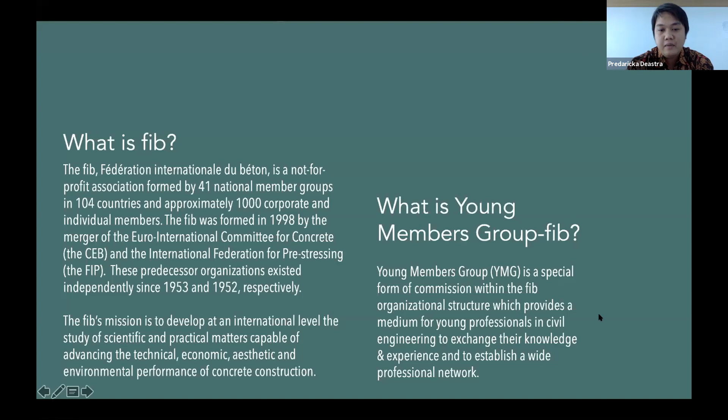The FIB also have Young Members Group, a special form of commissions, which provides a medium for young professionals in civil engineering to exchange the knowledge and experience and to establish a wide professional network. To deliver the mission, the FIB YMG also organized webinars with broad interesting topic in civil engineering area.

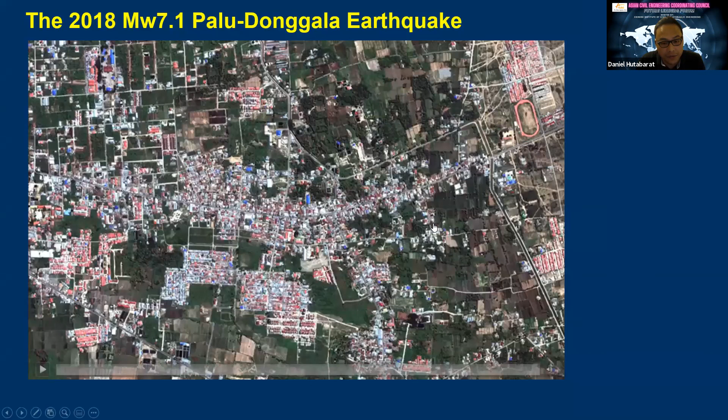Before I start, I'd like to show this unprecedented scale of ground movement during the Palu earthquake. I visited the site a couple of days after the earthquake to investigate what happened. We can see here where the ground moved due to the earthquake, due to soil liquefaction. The damaged area is about 2 square kilometers - a big, massive ground movement.

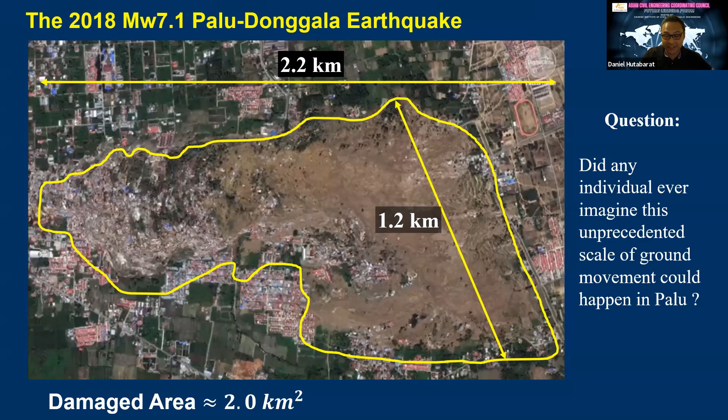When I visited the site, one question in my mind was: do you think any individual ever imagined this unprecedented scale of ground movement could happen in Palu? I think no one. That's a really important question, which indicates that risk assessment is very important, and all possible events that could happen should be quantified and analyzed. This type of unprecedented scale of ground movement should not happen again in the future.

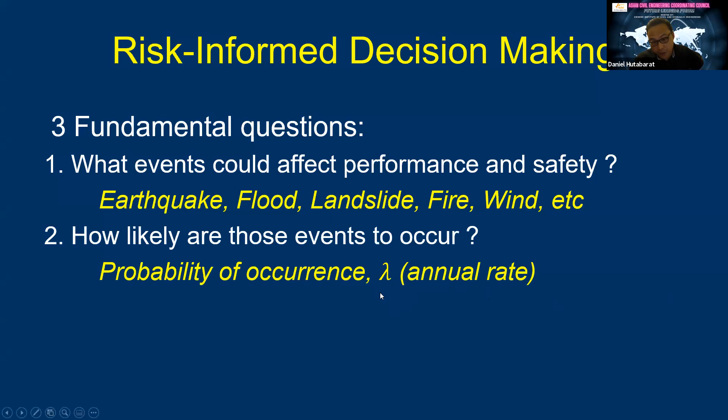As engineers, we are pushed by users, owners, and clients to inform them of the risks we are dealing with, and we're always asked three fundamental questions. First: what events could affect the performance and safety? Events like earthquake, flood, landslide, and fire. Second: how likely are those events to occur? We're talking about the probability of occurrence - how likely it happens in a year. I call this lambda, a variable I'll use later in this presentation, called the annual rate.

The third question is: what are their consequences? How many people will die? And what are the repair costs, economic damages? As engineers, we are at the center of the circle - we know the mechanics, we know the science. Only we can communicate all the hazards to owners, operators, users, policymakers, economists, scientists, and everyone.

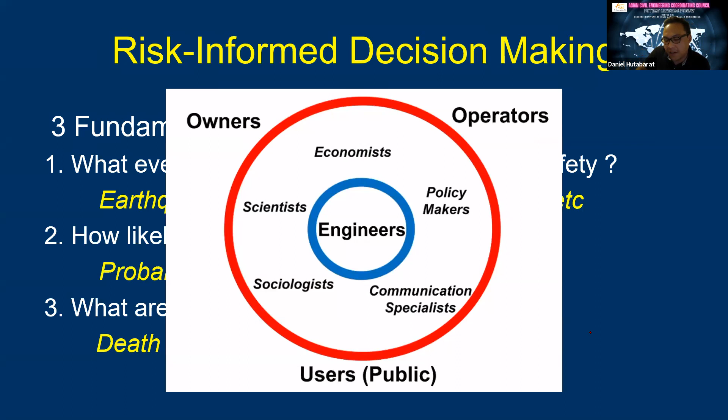In this presentation, I'd like to give an example of how we can assess risk using a holistic risk assessment approach in a simple project. I'll take a hypothetical example: let's say we want to build a railway track on an embankment, and the embankment is underlain by alluvial liquefiable soil.

Let's say the yield acceleration is about 0.2g, and the question is how large the slope will displace if an earthquake happens. We have two levels of site investigation: one with field measurement, and one using only empirical correlations from tests to estimate the stiffness of the foundation soil. This is an example of shear wave velocity - basically the shear modulus, which determines how the soil propagates the seismic wave during an earthquake.

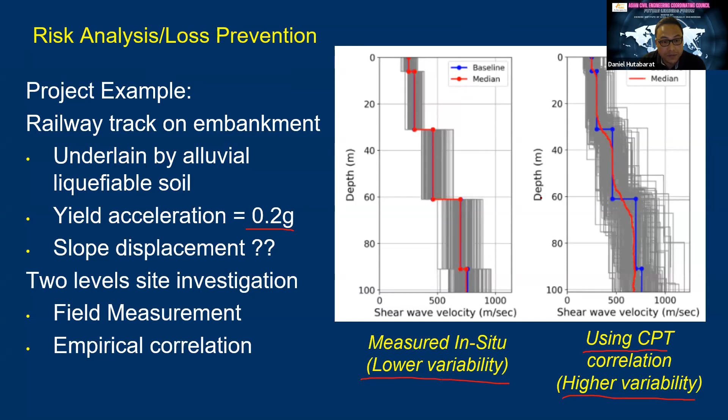On the left, this is measured in-situ parameters where the variability is narrower, compared to the right plot, which is estimated shear wave velocity using cone penetration test type correlations - this has higher variability compared to the left one. So we will deal with these two types of data, and then we want to assess what the risk is.

In risk-informed engineering decision-making, especially for earthquakes, when an earthquake happens it generates ground motions. The role of the engineering seismologist is concerned with how likely a 0.2g PGA is to occur - the level of acceleration that can yield the slope and cause it to displace.

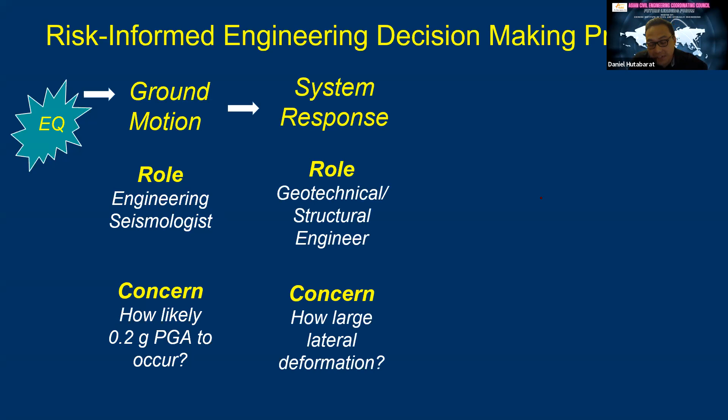The ground motions will excite the systems, such as a slope or a building, where we as geotechnical or structural engineers are concerned with how large the lateral deformation is. After the system responds, we want to quantify the physical damage, while the damage estimator or repair contractor is concerned with how large the railway will offset. And of course, for losses from the government and owner, the concern is how much the repair costs.

So how do we communicate all these steps of the process, and then we can take a decision to design our project. So that's the topic of my presentation today. In my institution now, which is the Pacific Earthquake Engineering Research Center, we have a framework called a performance-based design framework.

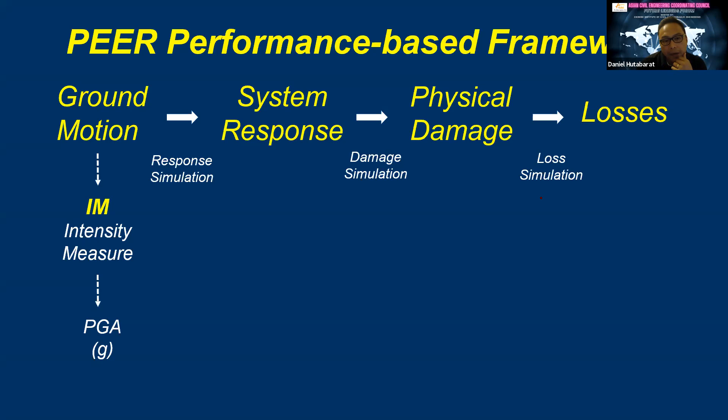Where the ground motion that occurs during the earthquake, we call it an intensity measure. For example, it's a PGA. And then from there, we can do response simulations to obtain how the system will respond.

And then we can quantify the engineering demand parameter, or EDP, which is the lateral displacement, like slope displacement. And of course, the damage measured from the physical damage, how far the rail will be offset and out of straightness, which will determine the repair cost, the decision variable DV, as a basis for the owner to take decision about the project.

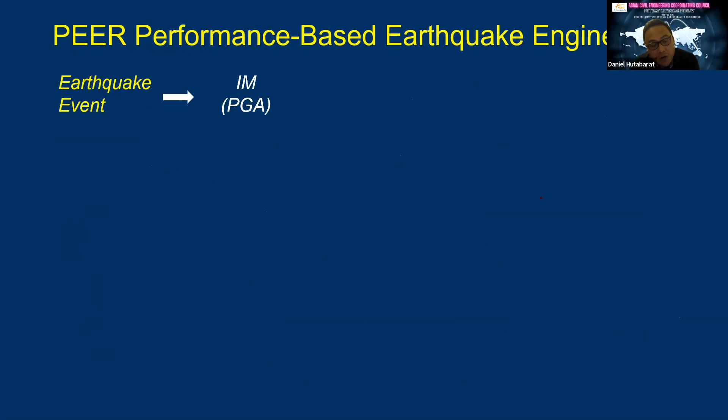So the PEER performance-based earthquake engineering is basically a very simple approach, where when earthquake happens, we want to know what is the intensity measure by performing hazard analysis.

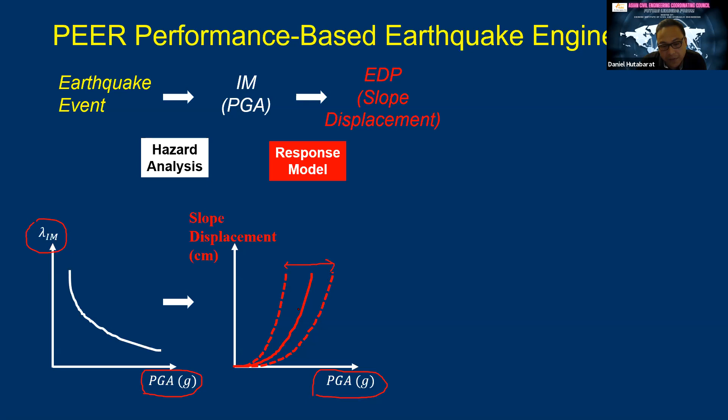And then once we know the PGA, we can estimate the slope displacement by using a response model like finite element analysis or limit equilibrium analysis - you can choose either one. And then we perform simulations by varying the PGA, increasing it, and then we can estimate the slope displacement. Of course, we have variability - this captures variability, and then we can estimate the model.

And then for the railway offset, we know the damage model, and we can estimate it by slope displacement - we know how much the offset is. And then from the offset, DV, we have a loss model, and from the railway offset we get the repair cost, which also has a variability. So as the offset gets very large, of course the cost will asymptotically reach a value, which makes sense, right? So how do we calculate this?

So let's imagine we have 5 possible peak ground accelerations, like 0.1g to 0.5g. And let's say this is what happened: when earthquake happens, it generates IM3, let's say 0.3g. From IM3, it generates about 25 centimeters of slope displacement, which is the EDP4. And then 25 centimeters of slope displacement will cause about 10 centimeters of railway offset, and from 10 centimeters of railway offset we can estimate maybe about $1 million of repair costs.

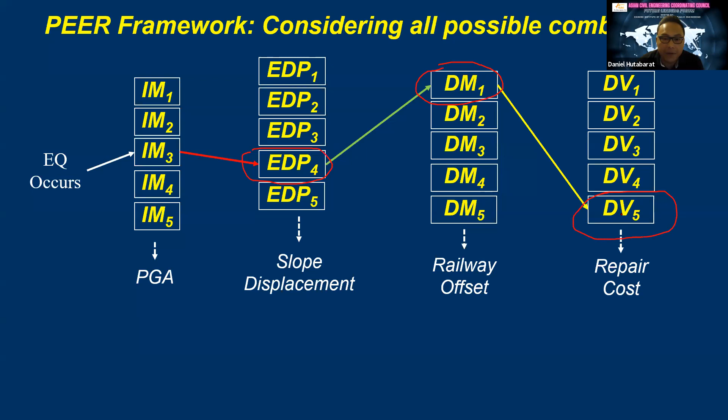But the probability that $1 million will be needed to repair this railway is the probability from the white color here, which is the earthquake, multiplied by the probability of how the PGA will cause a slope displacement, multiplied again by the green color, which is this step, and multiplied again by the yellow color, which is the probability of the damage measure - the 25 centimeter, 10 centimeter railway offset, causing a $1 million repair cost.

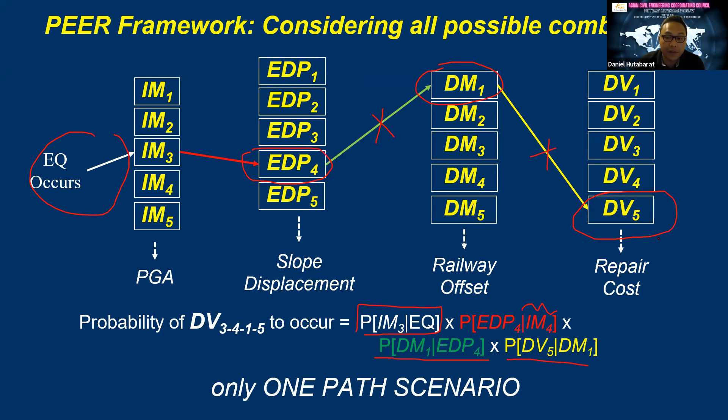But that's only one scenario, and the key of quantifying risk is we need to consider all the risks here. So how do we calculate this? Even though it looks very difficult, this is just summing all the possible events.

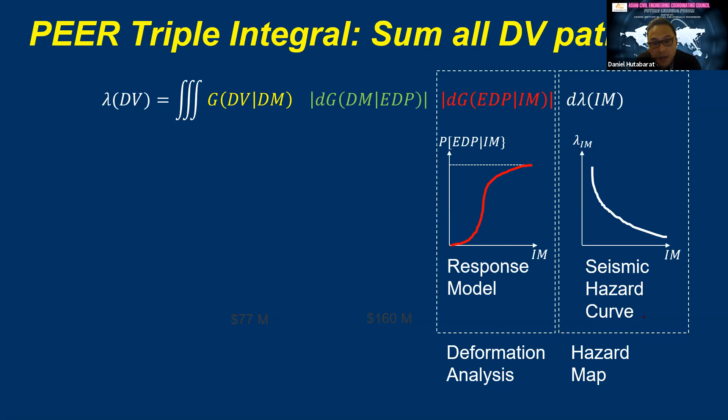So from right to left, the white curve is a seismic hazard curve, which we can get from a hazard map, for example a seismic hazard map of Indonesia. We generate a model, perform deformation analysis, and then we know the probability of a specific IM causing a significant EDP. And then from EDP we also get a damage model, and we keep multiplying them until, with a loss model as well, we finally get the loss curve.

For example, a loss curve for a specific project that I've been dealing with - this is one of the examples. Remember, I have two sets of soil investigation data. The blue color here is the annual probability that the owner will spend the cost. For example, for 0.001 here, it means a return period of 1,000 years.

The owner will spend about 160 million dollars if they use a cheap design without proper soil investigation and no expert hired, resulting in high uncertainty. If the owner chooses a better design with high quality soil investigation and lower uncertainty, the cost decreases. The probability of spending repair costs over 1,000 years drops from 160 million down to 77 million dollars.

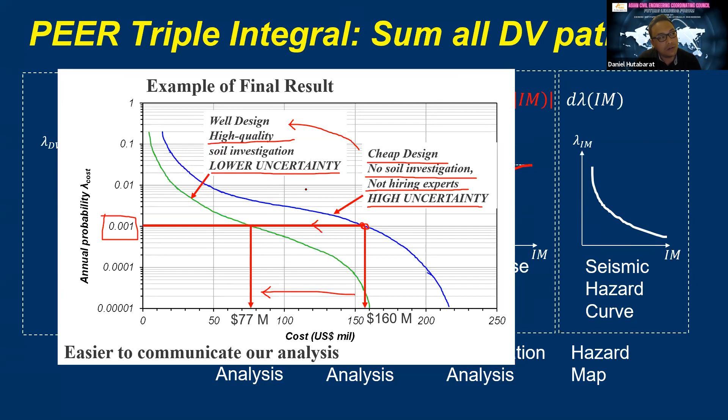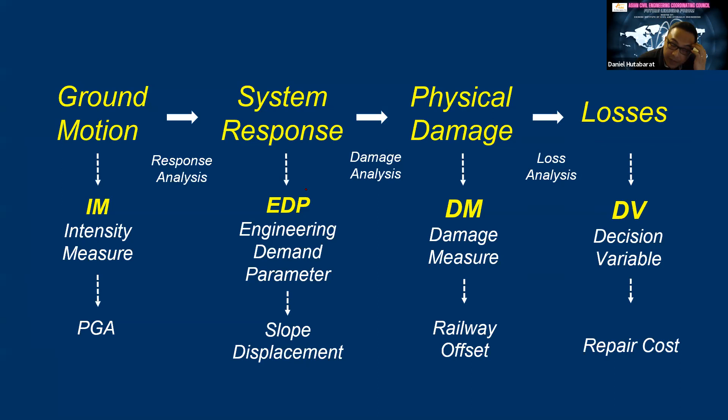By using this approach, we can communicate our analysis better to the owner and stakeholders. To summarize, this is an approach to quantify all the risks. Sometimes we forget the big picture because we were trained to stay in a box, focusing only on things like slope displacement or settlement, while structural engineers focus on building collapse, story drift, or drift ratio. We are trapped in these boxes when the big picture is bigger.

So the key takeaway is that we should always think probabilistically, constantly asking, what if this happened, what if that happened? We need to consider everything that can happen, so that the type of event that happened in Palu does not happen again.

The second point is hazard resiliency, which is all about risk estimation and loss prevention. By using the framework established in PEER, we have a well-established alternative approach to perform hazard resiliency evaluations.

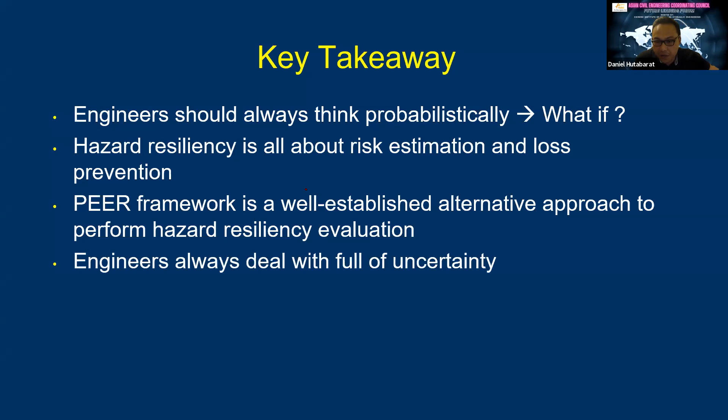Engineers always deal with uncertainty, and I think this is key. The challenge in any project, whether geotechnical or structural engineering, is uncertainty because we deal with geological materials full of uncertainty. I'd like to close with a powerful quote: risk is a measurable uncertainty, but uncertainty is an unmeasurable risk. So if we can measure anything, we can measure the risk.

I would like to remind all of us that we also have a code of ethics for engineers, this one from the U.S., where fundamental canon number one, our first priority, is that engineers shall hold paramount the safety, health, and welfare of the public.

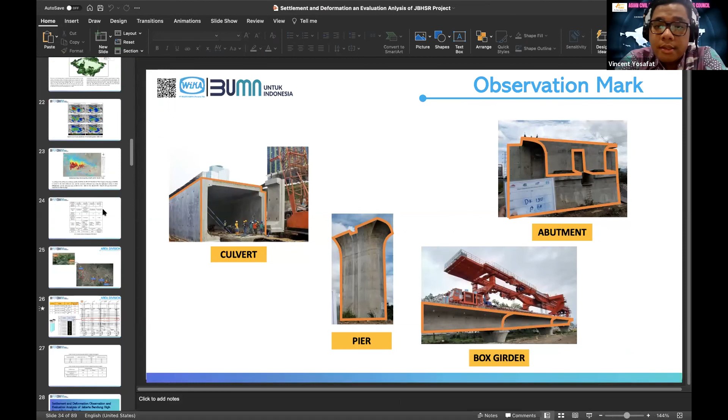Thank you for the kind introduction, Mr. Derek. Good afternoon everyone, it's an honor for us to be speakers at this ACECC webinar. Nowadays, infrastructure has become one of the main focuses of development and improvement in Indonesia. Hence, we are now faced with various mega projects, each with different challenges. But who here knows what kind of challenges we must encounter in one of these mega projects in Indonesia?

To answer that, let us introduce ourselves. I'm Vincent Yosafat, currently enrolled as construction manager, and my colleague Alve Yunus as engineering manager, at the Jakarta-Bandung High-Speed Railway Project, PT Wijaya Karya. We are now in charge of one of the most noteworthy projects happening in Indonesia.

For the first brief introduction of our project, it will be presented by Mr. Alve. Okay, thank you Vincent. So your screen is already seen, right?

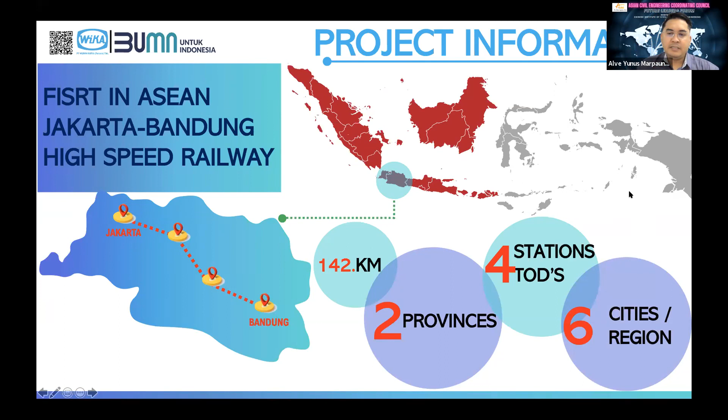The Jakarta-Bandung high-speed railway is considered the first high-speed railway in ASEAN. The length of this railway is 142 kilometers, crossing two provinces, with 4 station TODs, and crossing 6 cities or regions in Indonesia. The project name is Jakarta-Bandung High Speed Railway, or JBHSR.

The project owner is PT KCIC, Kereta Cepat Indonesia China. The contract value of the joint operation is around 4.71 billion US dollars, or about 62.83 trillion Indonesian rupiah. Our company, PT Wijaya Karya, has a 30% portion, so the value is about 1.4 billion US dollars, or around 19 trillion Indonesian rupiah.

The contractor in this project is the High Speed Railway Contractor Consortium. The members are from China and Indonesia. We have CREC for project management, CRDC for design work, CRSC for signaling work, and CRRC for the rolling stock of the train. CREC is considered one of the biggest contractors in the world, and then there's Sinohydro, and last is Wika.

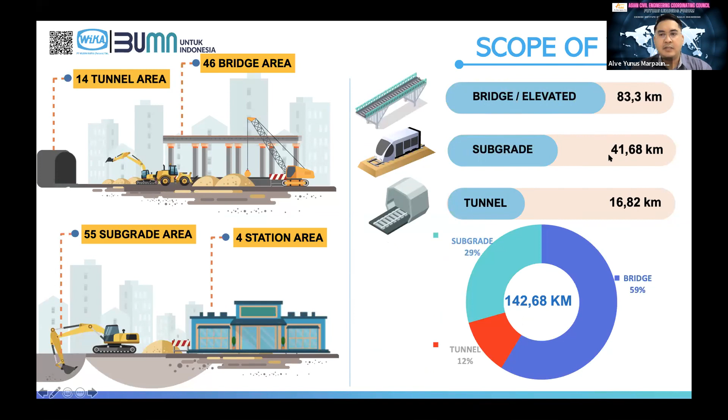This project has about 14 tunnel areas, 46 bridge areas, 55 subgrade areas, and 4 station areas. From the 142 kilometers, the elevated bridge is 83 kilometers, the subgrade is 41 kilometers, and the tunnel is 16 kilometers. This is the trace of our project from Halim to Bandung and Tegalluar.

It has 4 stations, divided into 4 sections: section 1, section 2, section 3, and section 4. For the whole structure, Wika has 30% of the portion. The blue color is Wika's portion, and the red color is the Chinese portion. For the continuous bridge, Wika's portion is 30%, and the elevated bridge is 40%.

For the pier column, in the whole project from Jakarta to Bandung, Wika has 100% of the portion, about 2,500 piers. For the tunnel work, it's all Chinese portion, and for the subgrade, Wika has 96% of the portion.

From Wika's scope of work, there are 1,200 pile caps and 12,000 bore piles, 155 box girder cast-in-situ, and 4 continuous beam structures. Wika's portion also includes 3 stations, and for the subgrade work, there are 69,000 spun piles, 6 million cubic meters of excavation, and 3.5 million square meters of embankment.

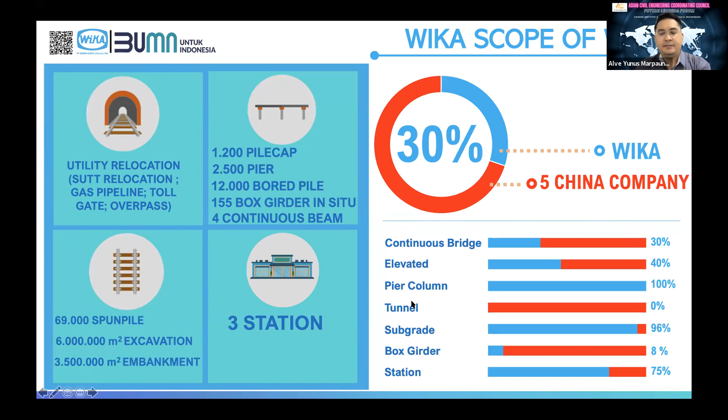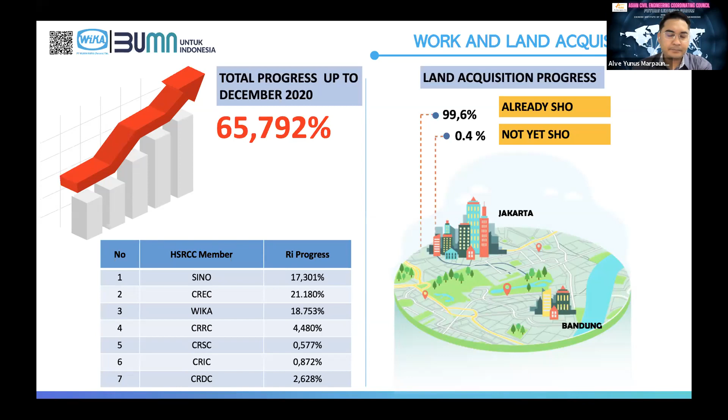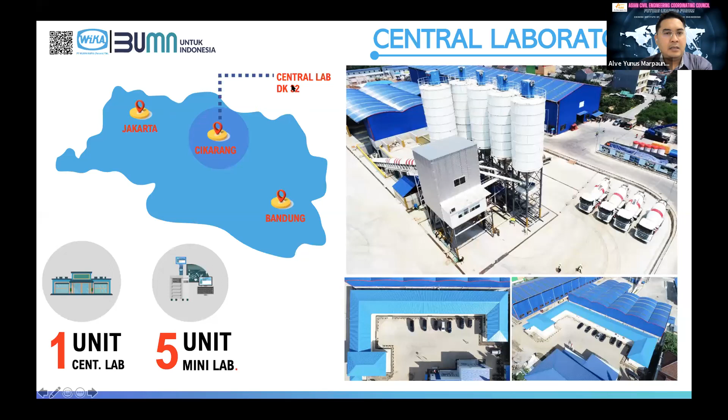DK on the high-speed railway is the same as station. So DK 32 means this is the stationing at 32 kilometers. For the general requirement, I will give it to Vincent.

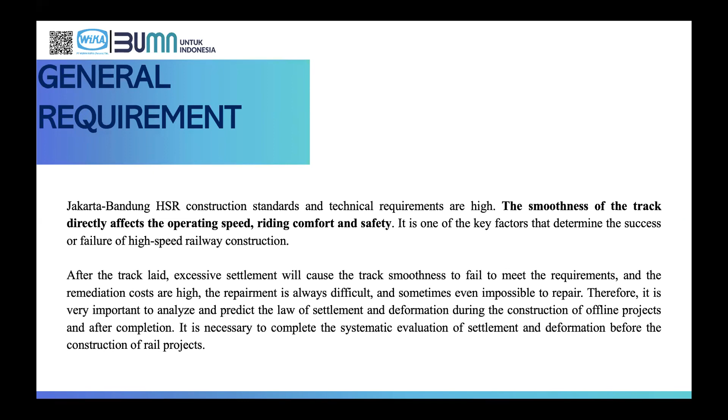Thank you, Alve. For the general requirement, I will explain to you. Jakarta-Bandung high-speed railway construction has high technical requirements. Like Mr. Daniel said before, from the code of ethics of ASCE, the fundamental canon number 1 is engineers shall hold paramount the safety, health, and welfare of the public. In this project, the smoothness of the track directly affects the operating speed, riding comfort, and safety. It is one of the key factors that determine the success or failure of high-speed railway construction. Therefore, it's important to analyze and predict the law of settlement and deformation during the construction of offline projects and after completion.

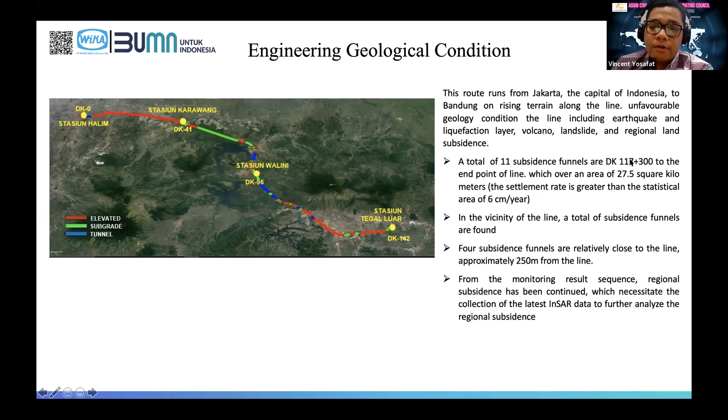Bandung is a basin with great land subsidence. Land subsidence is a phenomenon that has commonly occurred in big cities, especially in Indonesia. Bandung, as one of the big cities in Indonesia, has been identified for land subsidence. The land subsidence is suspected to be due to groundwater exploitation by the factories located around the Bandung Basin.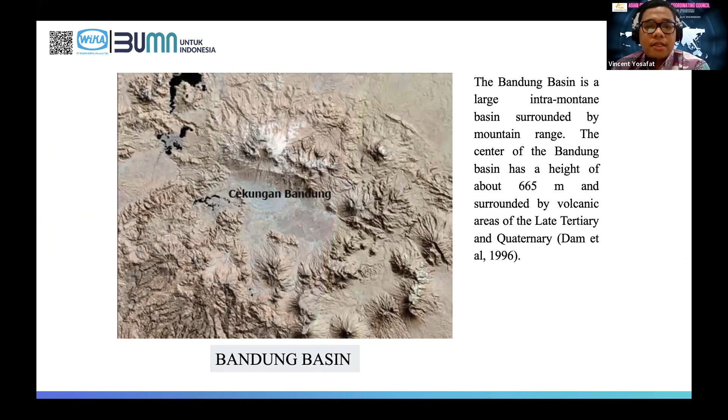The Bandung Basin is a large intra-montane basin surrounded by mountain ranges. The center of the basin has a height of about 665 meters and is surrounded by volcanic areas of Late Tertiary and Quaternary deposits.

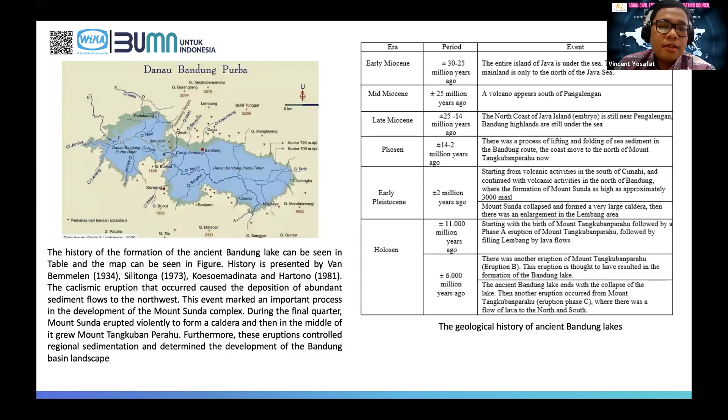This is the historical geology of the ancient Bandung lakes, as presented by Van Bemmelen, Silitonga, Koesoemadinata, and Hartono.

This event marked an important process in the development of the Mount Sunda complex. During the final quarter, Mount Sunda erupted violently to form a caldera, and then in the middle of it grew Mount Tangkuban Perahu. Furthermore, the eruption controlled regional sedimentation and determined the development of the Bandung Basin landscape.

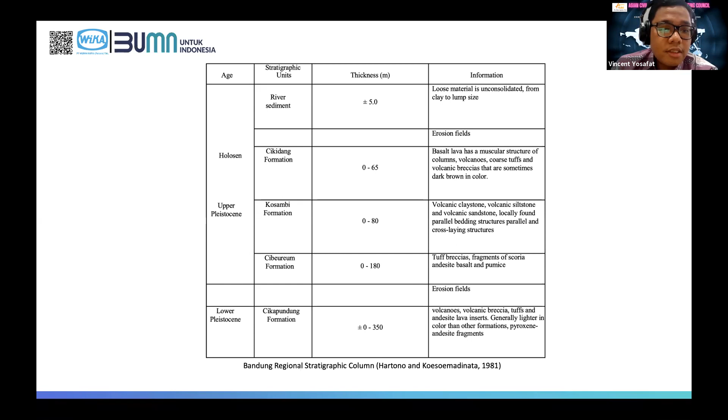And then, according to the settlement monitoring results of InSAR, from DK 118 up to DK 142 of the Jakarta-Bandung high-speed railway, the alignment is located in a land settlement area, with the maximum settlement along the high-speed railway about 140 millimeters per year. The settlement rates at DK 116 up to 124, 130 up to 130 plus 500, and 136 up to the endpoint are relatively high.

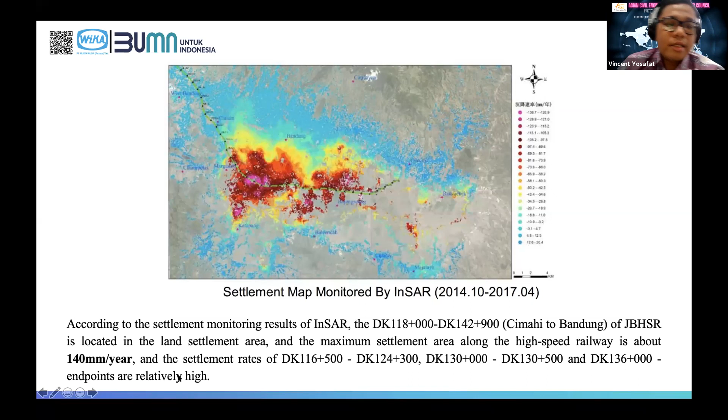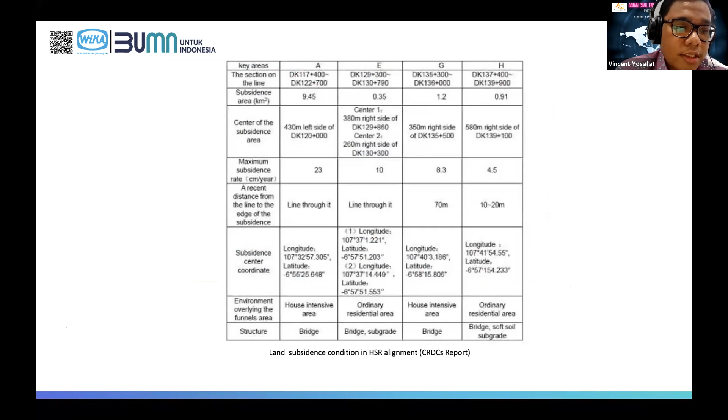As you can see on the table, these are the land subsidence values that are considerably high along the alignment.

I'm very sorry, Mr. Vincent, for interrupting. We have only very short time left, five minutes. Yeah, five minutes left is fine. Okay, Mr. Alve will continue the presentation. Okay, thank you, Vincent.

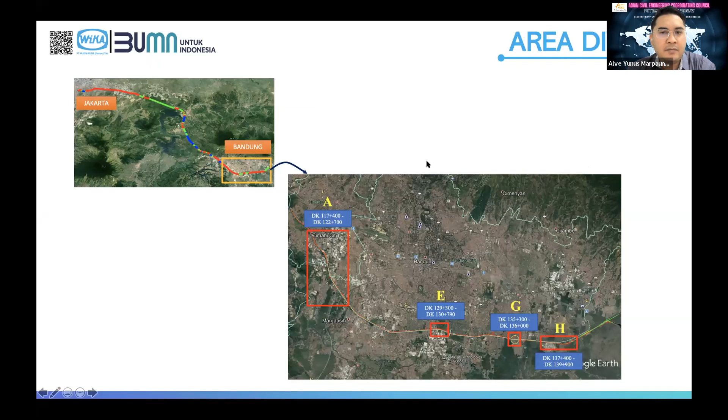So this is the four clusters mentioned before. This is the land subsidence condition along the high-speed railway alignment, as you can see in the table.

Because of the settlement area, the designer of this project designed the pile foundation to be very deep. The average length of the piles is around 50 to 94 meters in depth.

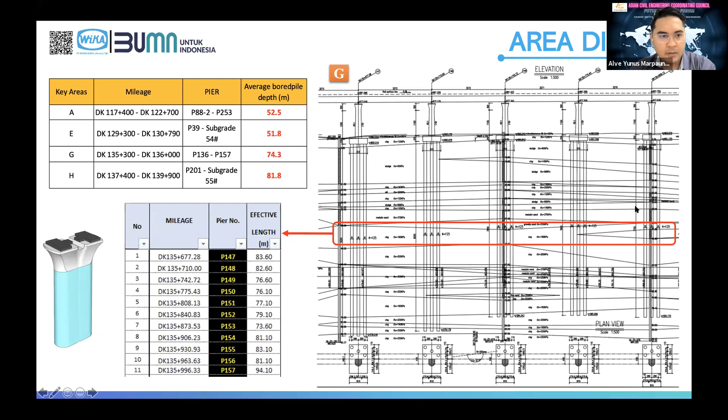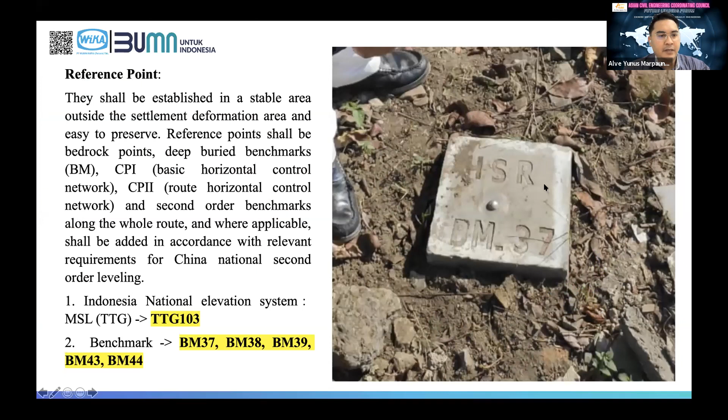The settlement deformation measurement points are divided into reference datum points, working base points, and settlement deformation observation points. This is the reference point we established to carry out the survey, and this is the layout of the reference points in Bandung.

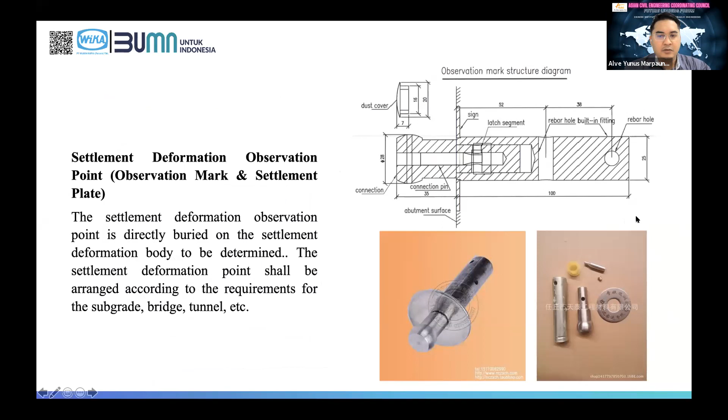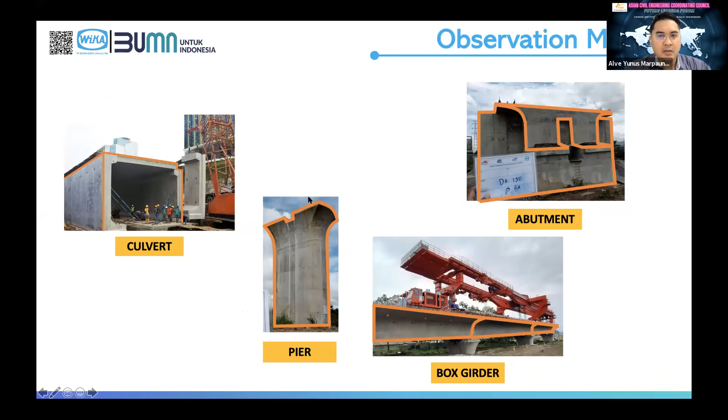This is the working base point, and this is the settlement deformation observation point. We need to install these to carry out the survey on the structure, as seen in this culvert structure with pier, box girder, and abutment.

For the pier, we need to install the observation mark about 1.5 meters above the surface so it can be seen by the surveyor. This is for the abutment structure.

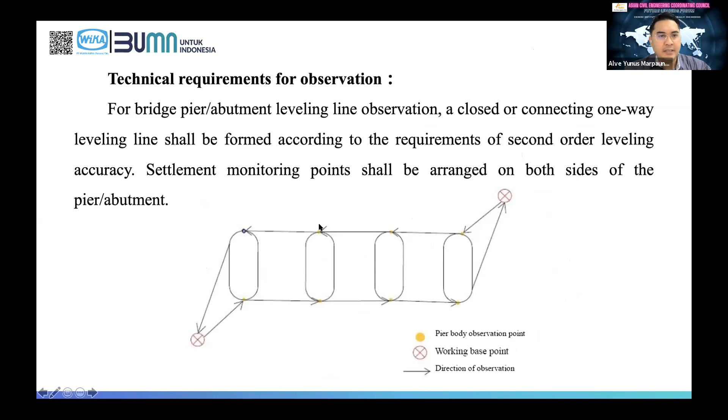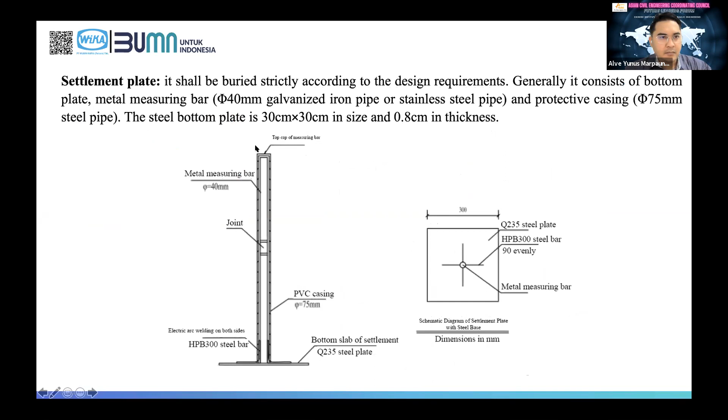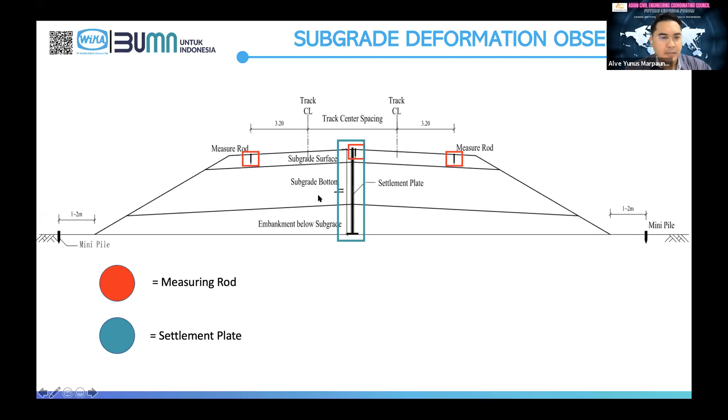We use a kind of settlement plate for this. This is the cross section of the subgrade, showing the measuring rod and settlement plate.

And this is the method of survey.

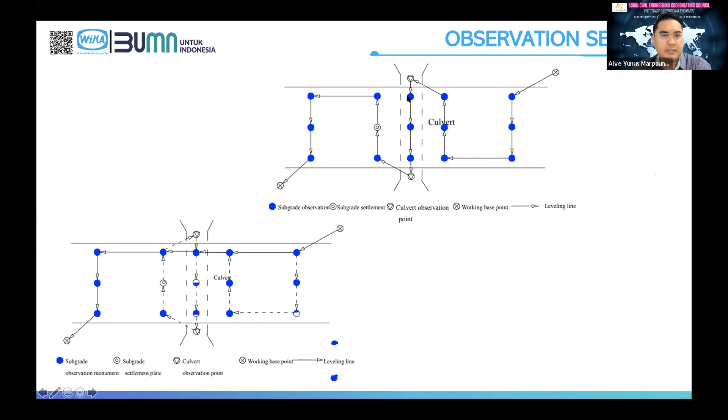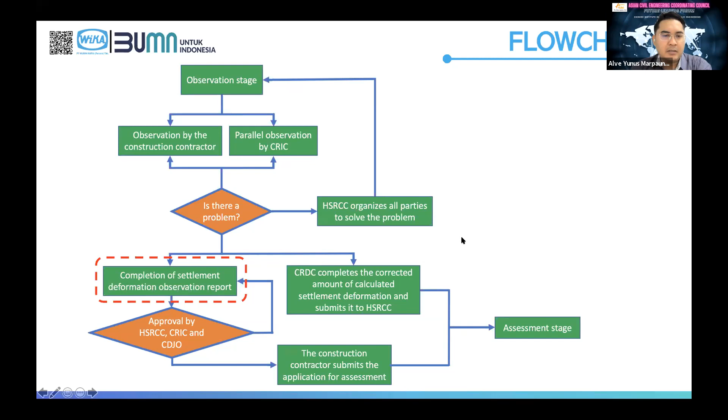We need to complete the observation report, so the designer can make adjustments about the settlement. This is the accuracy, and the level measuring instrument must use a digital level. This is the accuracy.

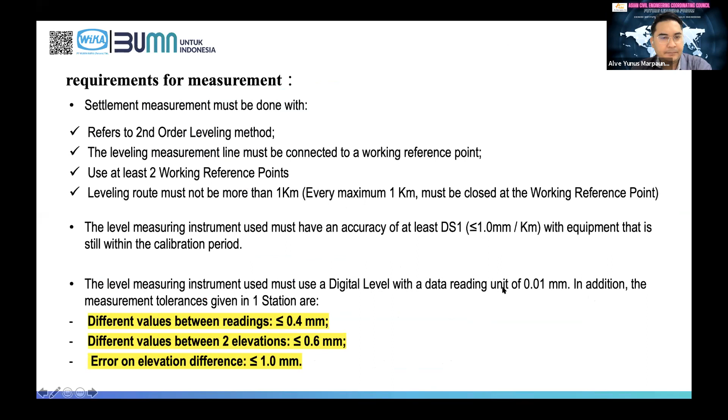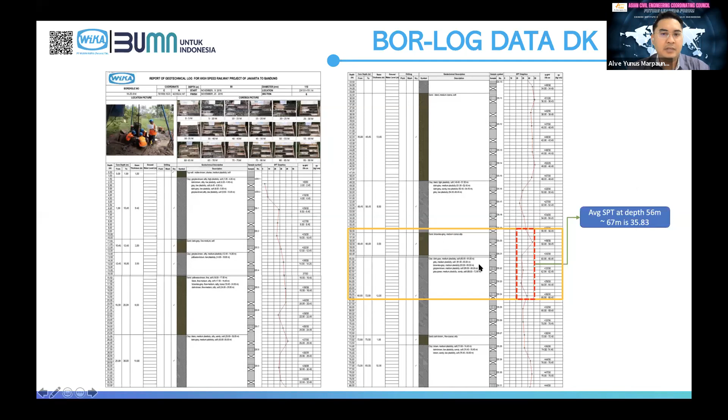For the design itself, the depth of the bore pile is already around 56 to 67 meters. So we don't only rely on the end bearing capacity, we also rely on the friction capacity, because it is an ancient lake.

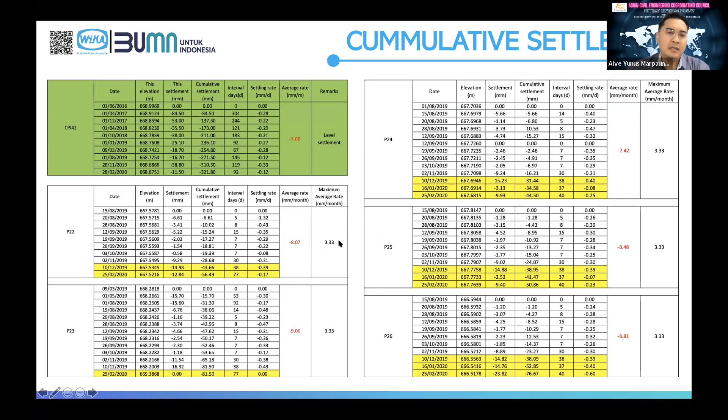This is the long section for the depth of the bore pile. Then you can see the cumulative settlement from our analysis. The average rate of settlement of number 22 is minus 8 millimeters per month. If on the tolerance from the designer, it's just 3.33 millimeters.

We have only 1 minute left, so maybe we can jump to the conclusion.

As you can see, the maximum average rate for settlement per year is 40 millimeters, but the actual average rate of settlement is around 90 to 100 millimeters per year. In view of the problem of regional subsidence in the Bandung area, through the current monitoring data it is found that the local subsidence is large. In order to solve the subsidence problem, the designer, in this case CRDC, adopted the method of fine-tuning the vertical section, adjusting the height of the padstone, and adjusting the ballast thickness.

There are two conditions: during construction and after construction. During construction, we can adjust the elevation of the padstone or pedestal where the bearing pad is, before the erection of the structure. If the condition is after construction, or on the operational stage, we can adjust the thickness of the ballast layer periodically, or as an extreme solution, adjust the pedestal level by jacking the box girder.

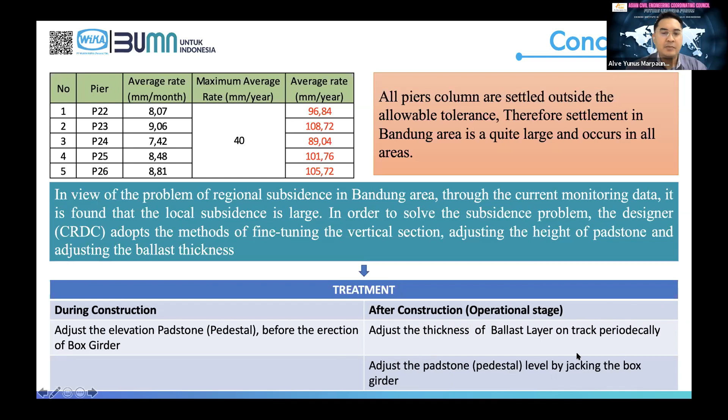The conclusion is that on this project, all contractors attach great importance to settlement observation and measurement, especially the settlement observation and evaluation work, which is a necessary basis for and a required work for complete acceptance. Therefore, it is necessary to increase measurement work management, ensure the authenticity and continuity of the observation data, and create conditions for the smooth development of the follow-up track construction. Thank you.

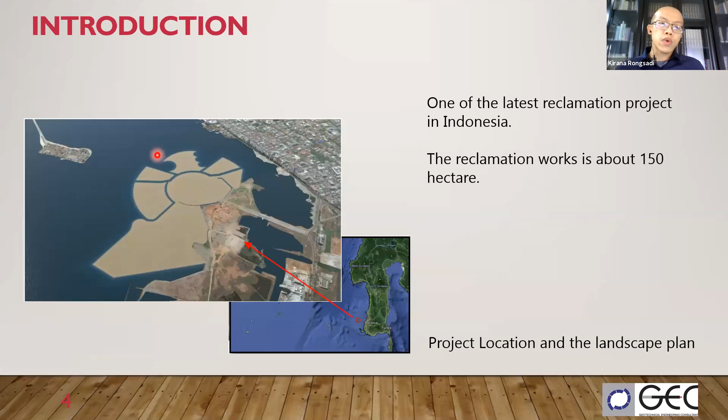The project location is at the west side of Makassar city, on Makassar Strait next to Makassar Port, South Sulawesi. This is one of the latest reclamation projects in Indonesia. As we can see, this is the landscape plan of the reclamation work, about 150 hectares.

The purpose of study is based on the geotechnical problems we may face during reclamation works. The first problem is the density issue of the compacted fill material, which is sand fill, related to bearing capacity and liquefaction potential due to earthquake. The second problem is the stability issue along the construction period due to the existence of very soft soil. The third is the degree of consolidation of the very soft subsoil, which will be the focus of this study.

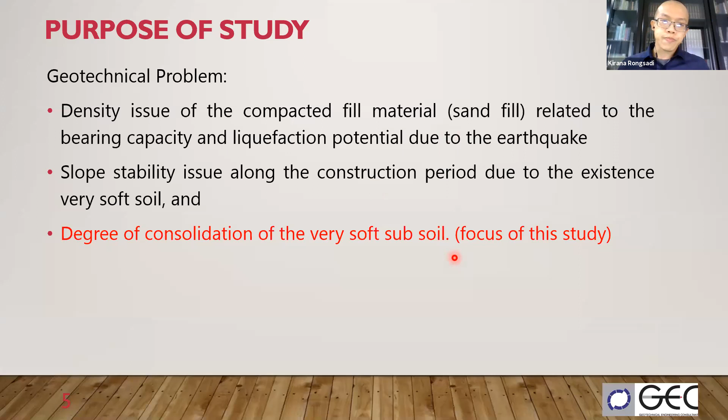The study will be evaluated based on the settlement plate data and CPTU data.

Before we start, I would like to explain about the CPTU itself. The CPTU is in general the same as the electrical CPT. From CPTU, we can get the cone resistance, and we also can directly measure the sleeve friction and the pore water pressure.

This is because with the CPTU, there are what we call the pore filter. Based on the location of the pore filter, there are three types of CPTU. The first one is the pore filter located on the cone tip, usually called U1.

The second is the pore filter located at the back of the cone, usually called U2. The third is the pore filter located behind the sleeve friction, usually called U3.

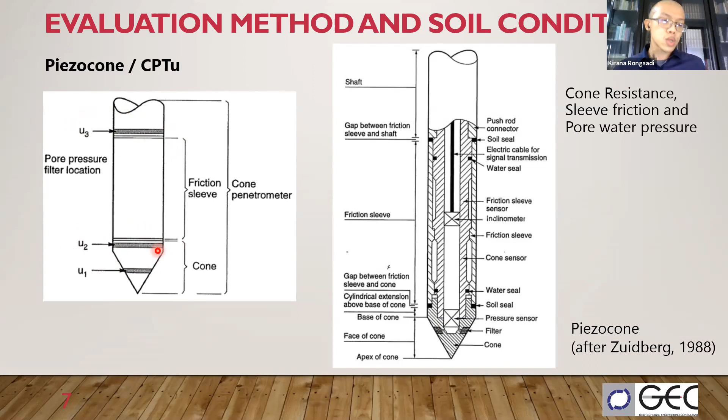The piezocone with the U2 pore filter is most commonly used in practical applications, including in this project.

Based on the measured data, we can also calculate the total cone resistance. With this equation, the A value is the cross-sectional area ratio of the pore filter, which is equal to 0.81 for the CPTU used in this project.

This is one example result of CPTU from the project. The first one, as discussed before, is the cone resistance directly measured from CPTU. Then we also directly measure the sleeve resistance and the pore pressure, or U2.

From the cone resistance curve chart, we know that from 0 to 10 meters depth, there is a sand layer with QC between 4 MPa and 8 MPa, followed by a soft soil layer of clay to silty clay with QT below 1 MPa.

This is the measured sleeve resistance. In the pore water pressure U2 plot, we can draw this red line, which is the hydrostatic pore water pressure, and the black line is the directly measured U2.

The difference between the black line and the red line is what we call excess pore pressure, or delta U. Based on these three basic directly measured parameters, we can also calculate other parameters such as the friction ratio, which is Fs divided by Qc, and the pore pressure ratio Bq, calculated as U2 minus U0 (delta U, or excess pore pressure) divided by Qt minus sigma V, the total stress of the soil.

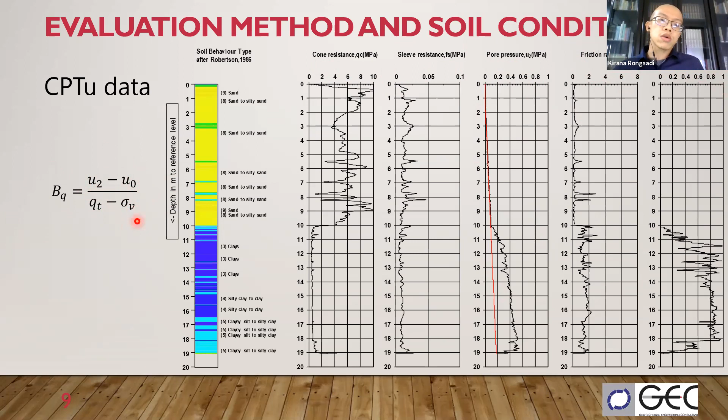This is the first method to evaluate the degree of consolidation based on CPTU data. This has been published by Setionegoro and Rahardjo in 2013, and Rahardjo et al. in 2016.

As seen in this figure, when the degree of consolidation is equal to 1, we get the Bq value equal to 0.7. So when the Bq ratio is larger than 0.7, it means the soil is still consolidating. If the pore water pressure Bq is smaller than 0.7, the soil condition is overconsolidated. The degree of consolidation can be directly calculated using this equation.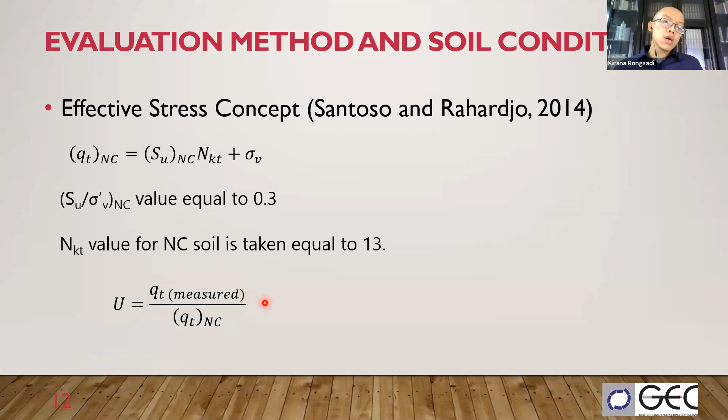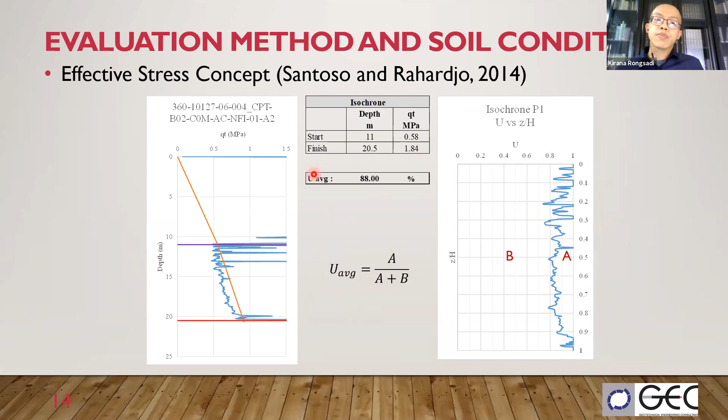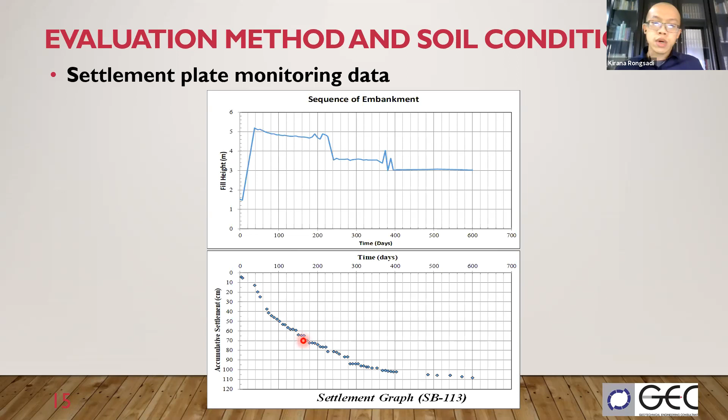This is the example of settlement plate monitoring data. This chart is fill height versus time, and this chart is the accumulative settlement, measured directly from the settlement plate, versus time. From that data, we can estimate the final settlement by various methods.

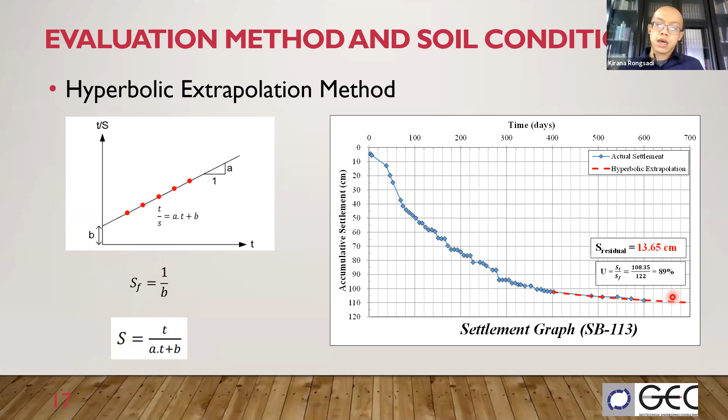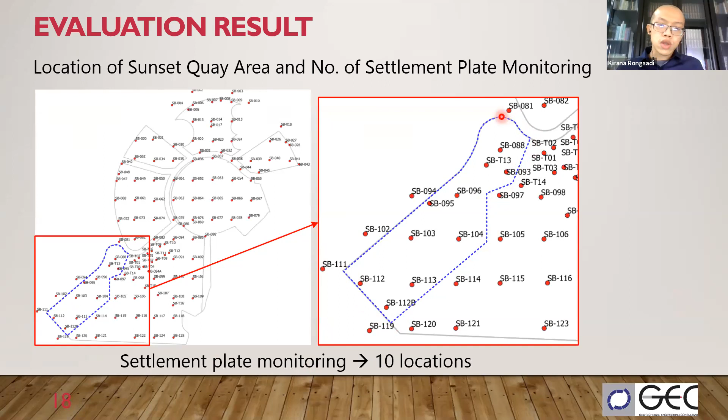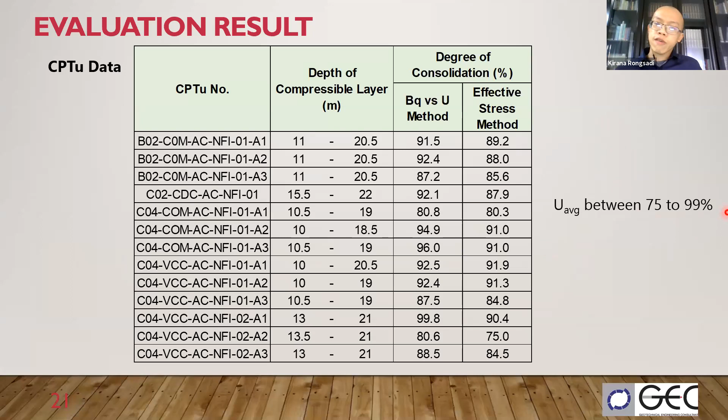I'm sorry, Mr. Kirana, for interrupting, because we have a limited amount of time. I think we only have 2 minutes. We can jump to the conclusion, maybe.

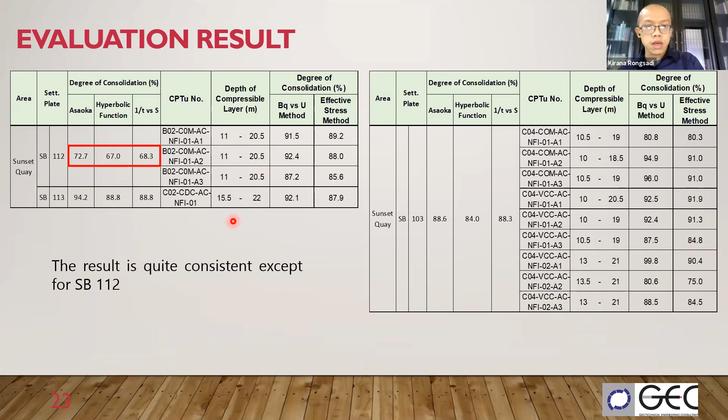This is the settlement plate and CPTU comparison, which gives quite consistent results, except for SB 112.

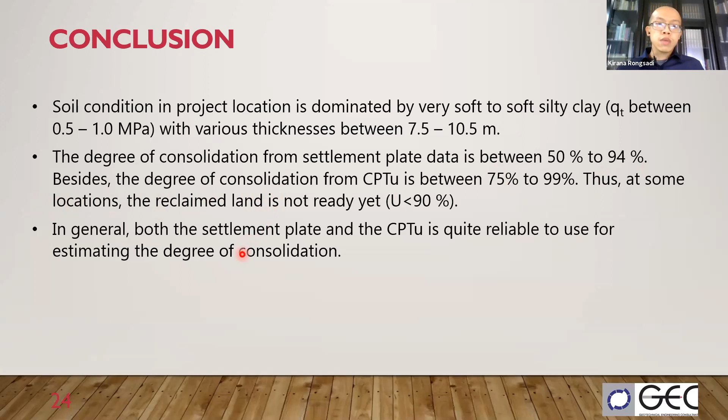This is the conclusion. The soil condition in this project is dominated by very soft to soft silty clay, with QT between 0.5 to 1 MPa, and various thicknesses between 7.5 to 10.5 meters. The degree of consolidation from the settlement plate data is between 50 to 94%. Besides, the degree of consolidation from CPTU is between 75 to 99%. Thus, at some locations, the reclaimed land is not ready yet. In general, both the settlement plate and the CPTU are quite reliable to use for estimating the degree of consolidation. That's all for today. Thank you for your attention.

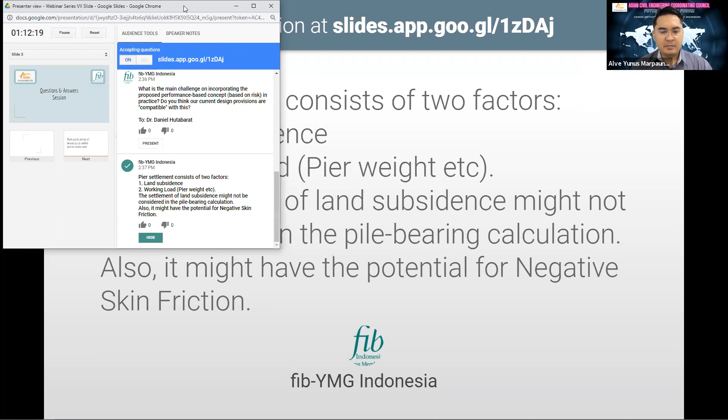Okay, you are correct. The settlement consists of two factors: the land subsidence itself and also the working load of the pier. Our Chinese designer still tried to figure out why the settlement still happens, because in their design, the depth of the bored pile, the diameter of the bored pile, and also the number of bored piles is so huge compared to other infrastructure projects such as the elevated toll road of Jakarta-Cikampek and also the light rail transit in Jakarta, Bekasi, and Depok. So our Chinese designer already considered that, but they still haven't figured out why the settlement is still happening.

That's why right now we are still in the during-construction phase. So we, as the contractor, still do the observation phase. We want to know how much settlement still happens, and until when. So maybe that's why we have two solutions. The first one is, during construction, we can adjust the level of the bearing, the pedestal where the bearing pad is laying. Then, after construction, or in the operational stage, we can readjust the thickness of the ballast. So periodically, maybe after one year, if settlement happens, we adjust the ballast, and the next year we can adjust the ballast again. And if the settlement continues, maybe the extreme solution is we jack the girder and then add the thickness of the padstone. So, so far, I know there are solutions for this case.

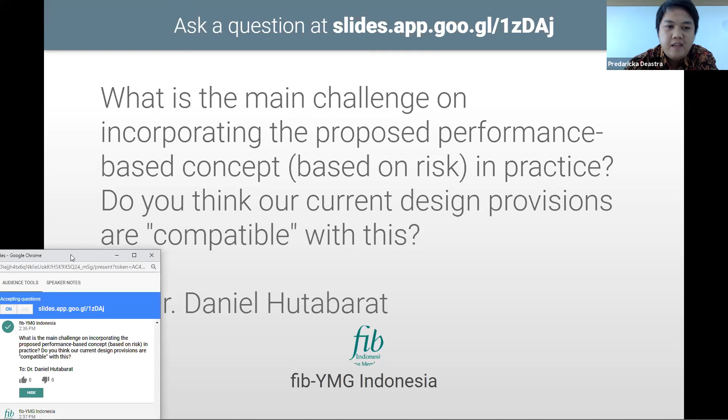Okay, thank you for the question. The most determining parameter, I think, is the existence of the soft soil, usually at the base of our fill placement. And the challenge is it will be quite a significant geotechnical problem, including the density of the sand fill, the slope stability, and also the degree of consolidation, which is what I mentioned before. That's my answer.

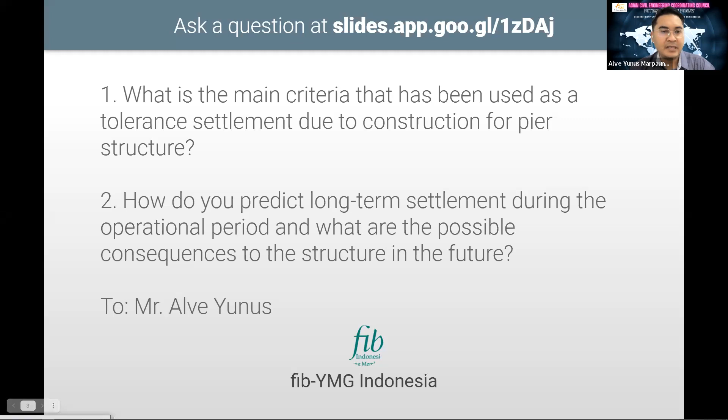Yeah, so all of that is already in the Chinese high-speed railway code, but the main issue in this project is the settlement on the Bandung area is bigger than all the Chinese cases that have been used by us. So that's why we are now still in the observation phase. We periodically measure the settlement every month and every year.

Maybe I don't know, maybe for the next 5 years we still do the observation, so we can know when the settlement has already stopped or is still ongoing. So that's why it is still a study from the Chinese designer. So maybe the temporary solution that we can do for now is just adjust the level of the structure, because there's nothing wrong with the design from the Chinese designer.

That's all I can say, yeah, Mr. Deastra, for now.